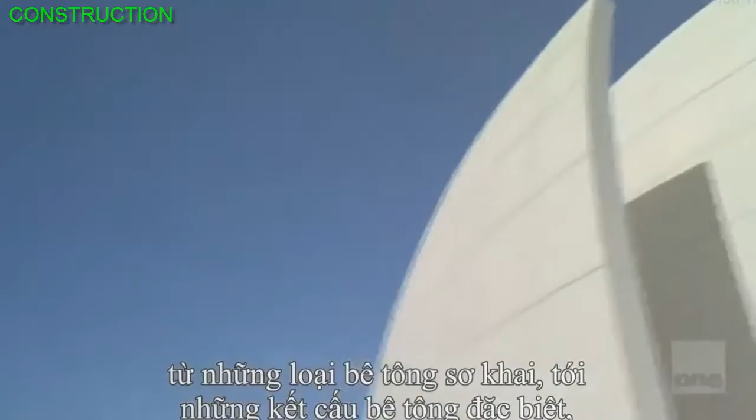Yet how these simple components are mixed together can make the difference between tragedy and triumph. From the mundane to the massive. From the ordinary to the extraordinary. Concrete helped pave the way for innovation and laid the foundation for the world's greatest civilizations. Now, go inside the science of concrete.

It starts out like liquid. When it dries, it becomes stone hard. This amazing metamorphosis has earned concrete the nickname liquid rock. It has served as a cornerstone of engineering for centuries. And it's a highly prized tool of construction for a reason.

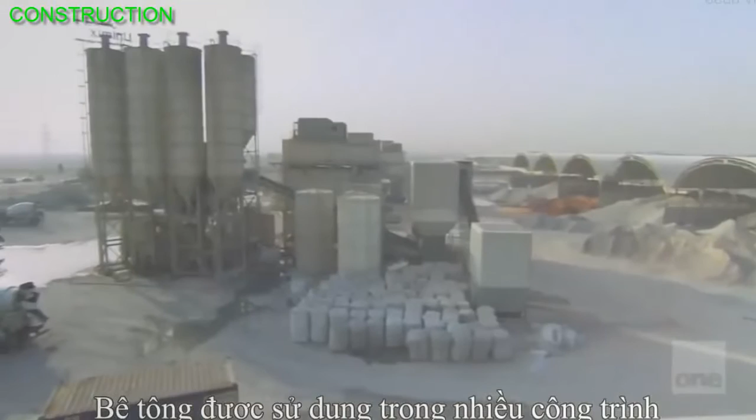It's easy to take concrete for granted. People see it in sidewalks and roads all the time, every day. But in fact, it is the closest thing to a miraculous material in construction that we've ever had. Concrete is everywhere. It has an almost unlimited engineering potential. It can take on nearly any shape and forms the backbone of a variety of the world's construction.

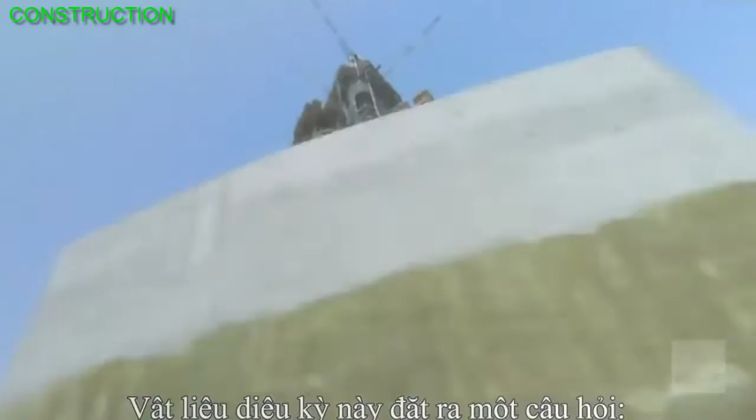Superhighways, massive bridges, man-made waterways, mega dams, the world's tallest skyscrapers. This miracle material begs the question, how does it do it all? I worked on a lot of jobs, and basically they all have a different formula for their concrete. Now I can't imagine the world without concrete.

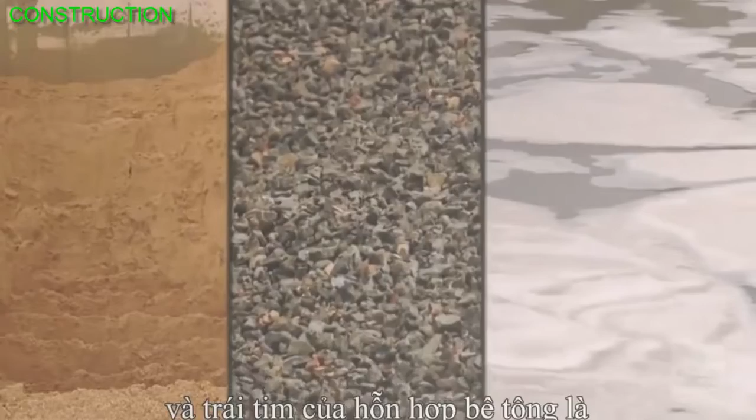The basic formula for concrete is simple: sand, crushed rock, called aggregate, water, and the heart of the concrete mix, cement. Cement, it is the gray, powdery material that acts as a glue that sticks all of the concrete together. It covers and coats all of the gravel, the sand, and the rock as a way of gluing and binding the whole material together.

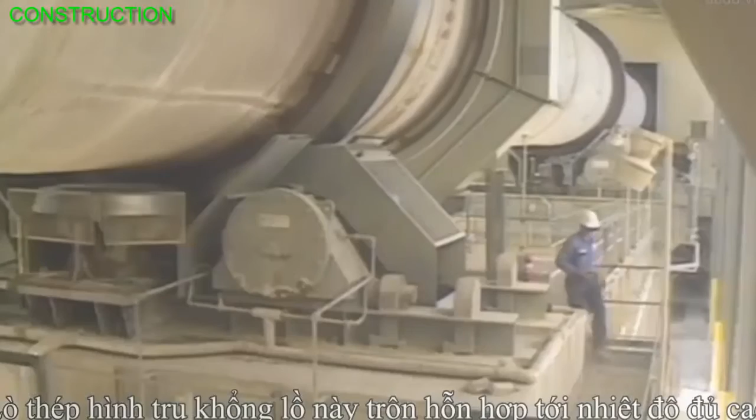To make cement, you need limestone, clay, and other elements like iron. These ingredients are crushed and combined into a powder that's poured into a kiln. The massive cylindrical spinning kilns heat the mixture to a temperature as high as 2,700 degrees Fahrenheit. The mixture becomes partially molten, forming a new marble-sized component called clinker. Once cooled, machines grind clinker into a superfine powder we know as cement.

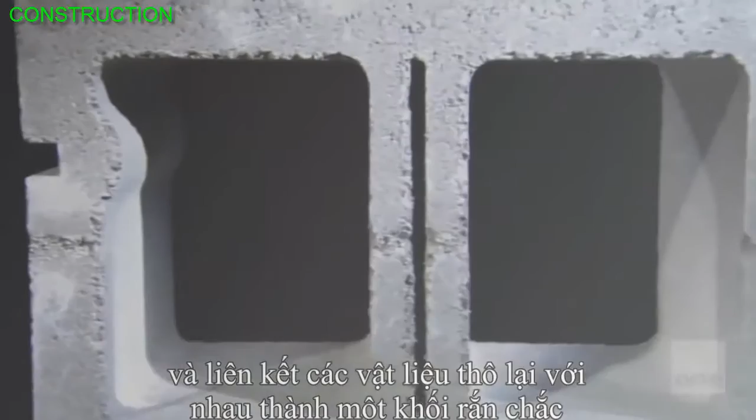Cement binds the ingredients together. When added to sand, water, and crushed rock, the cement reacts, linking the raw elements into one powerful whole. Water is the key. When cement reacts to the water, it undergoes a transformation called hydration. During this reaction, a node forms on the surface of each cement particle. The node grows and expands, linking up with other nodes. It sticks to the crushed rock and sand in the mix. Cement binds these ingredients. As it solidifies, concrete becomes a building block of modern construction.

The water actually allows a chemical reaction in the cement to allow it to harden. People often think that concrete hardens by drying. It actually hardens by hydrating or getting more wet. The water in the cement mixes with a lot of the minerals and chemicals that are in the cement, and by that mixture forms a new compound which then hardens. This basic process hasn't changed in over a century.

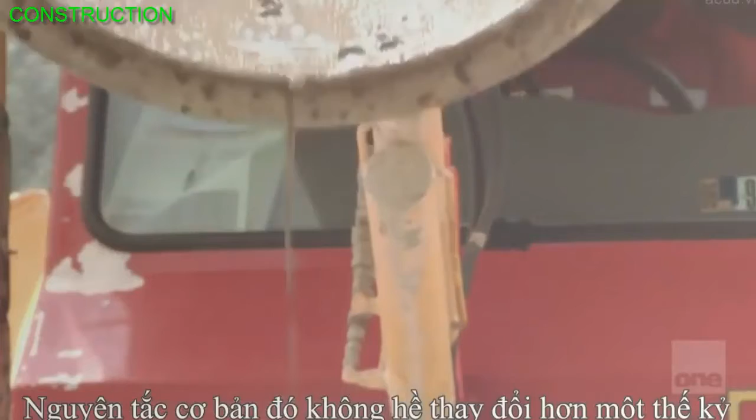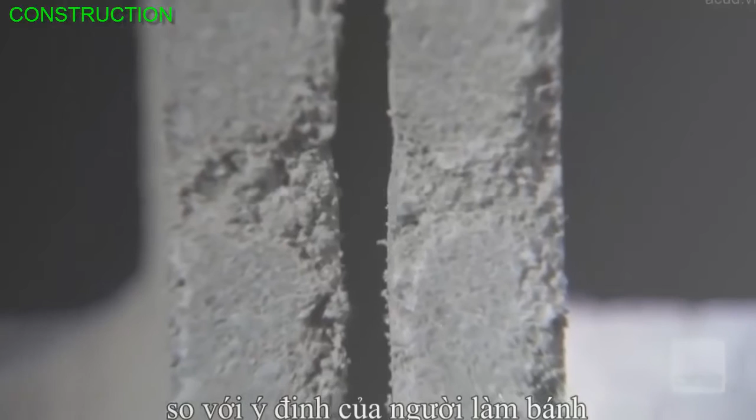But creating concrete is no simple matter. Making the right recipe requires precision and flawless preparation. It is a synergy of ingredients and timing. In a way, making concrete is like making a cake. There are lots of different recipes to make a cake. You get different flavors, different colors, different textures, but there are also lots of ways that you can make a cake wrong. It's not going to set properly, or it can come out in a way that's very different from your intentions. Getting the recipe right is everything, and the consequences of a flawed mix can be deadly.

The residents of Mexico City learned this the hard way. On September 19th, 1985, the Mexican capital is rocked by an 8.1 magnitude earthquake. It causes up to $5 billion in damages. Investigation of the rubble reveals that many of the buildings had been made of a substandard concrete.

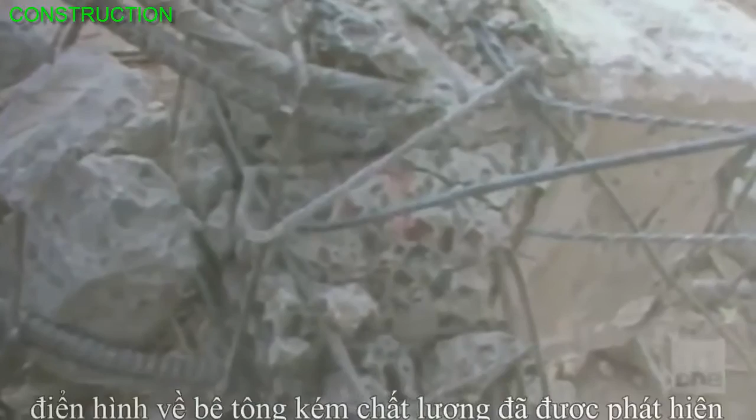Yes, we saw examples after the Mexican earthquake where when you use inferior concrete and you skimp on the rebar, and we saw both extensively in Mexico City, the concrete doesn't have its expected strength. The result is walls would fracture and shear and the building would collapse when the expectation would have been that the building should have easily survived to preserve health and safety. The consequences of this quake are tragic. An estimated 10,000 die. Another 50,000 are injured.

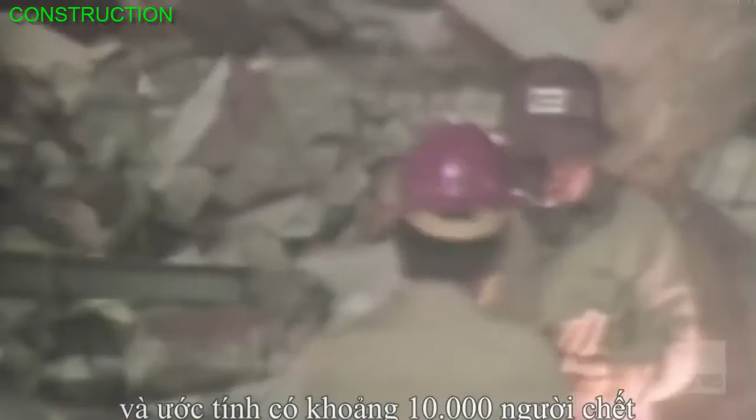But with the right formula, structures made of concrete can endure thousands of years. The ingredients for concrete have stayed the same for centuries. But there has always been room for innovation. With special ingredients and slight adjustments to the formula, concrete can adapt to the challenge of a specific project.

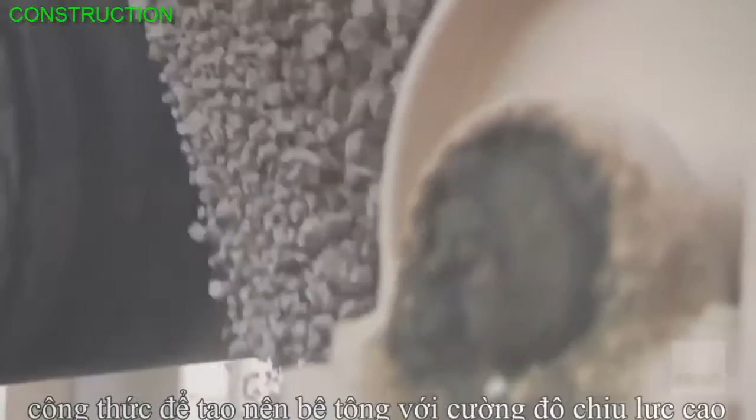Want a dam to hold back 52 million gallons of water? Add less aggregate to the formula to create a concrete with greater density. Want to create the foundation of an epic skyscraper? Add less water for a faster drying mixture. The array of different recipes is virtually infinite.

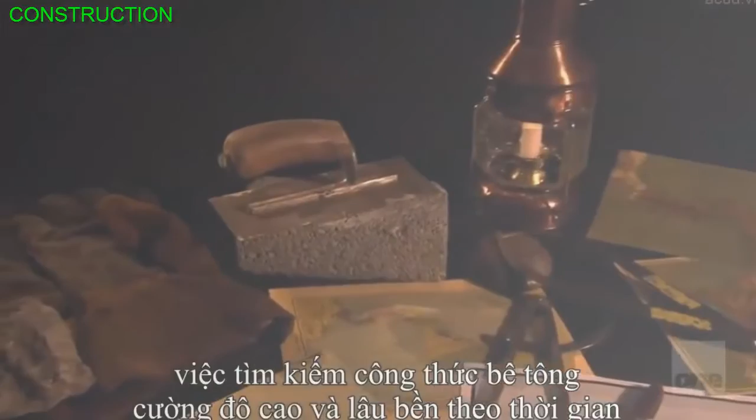The hunt for the right formula for a specific project is nothing new. The search for the strongest and most durable recipe goes back thousands of years. Although other civilizations, including the Egyptians, experiment with concrete, the Romans transform it from a supporting material to a main substance. In Rome, liquid rock fuels the dreams of an empire.

The word concrete even originates in Rome. From the Latin concretus, it means grown together or compounded. Roman concrete contains the traditional ingredients of sand, water, and crushed rock. But volcanic ash from the hills of Pozzuoli, Italy, transforms the material.

The Romans were very astute architects and engineers, and they recognized that by mixing volcanic ash from near Pozzuoli in Italy, they were able to get a concrete that became very hard. This volcanic ash proves to be an adhesive binding agent. It gives ancient Rome a powerfully strong concrete.

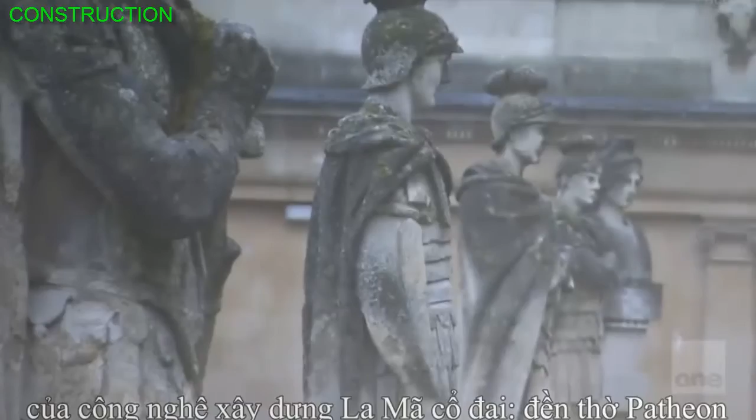This innovation allows the Romans to craft an empire from the ground up. Concrete becomes the backbone of a dizzying array of structures, aqueducts, bathhouses, and markets. But today, one structure alone stands as a unique testament to the power of ancient Roman concrete: the Pantheon.

The Pantheon is one of the great architectural works of ancient Rome, with the wonderful colonnade that introduces the building, and then a huge drum covered by this amazing 142-foot dome, and that dome is made of concrete. Constructed around 125 AD, the Pantheon has stood prominently in the center of Rome for over 1,800 years. It is one of the world's oldest buildings in continuous use.

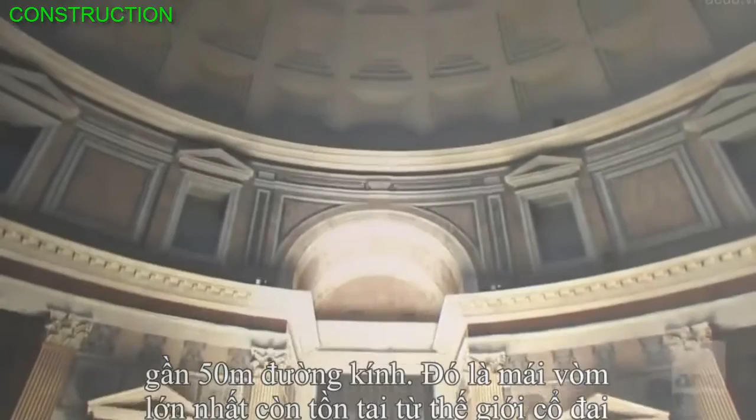This former temple to the Roman gods combines elements of engineering and design, and nowhere is that more apparent than in this concrete dome. Stretching 142 feet in diameter, it is the largest surviving dome from the ancient world. It was the largest dome in Western Europe until the 15th century. Unlike modern-day domes, which are generally reinforced, the only material holding the dome of the Pantheon together is Roman concrete.

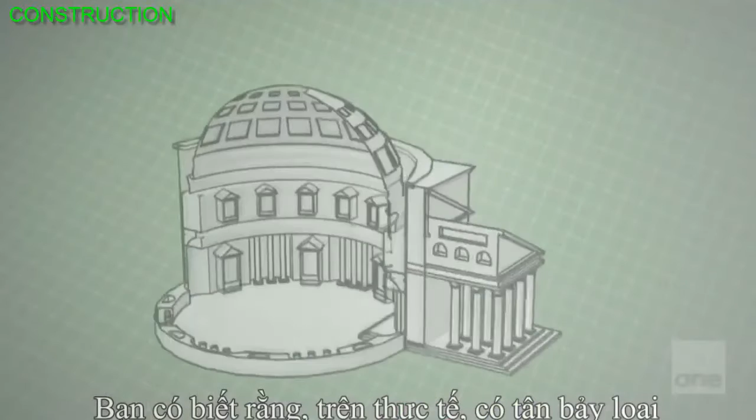Constructing an unreinforced concrete dome on the scale of the Pantheon is just an incredible engineering achievement. You couldn't do something today because everybody would have appraised the odds of your success as so small as you would never get a chance to do it. There's actually 7 different types of concrete used in the construction of the Pantheon dome.

And the way they distributed their aggregate and changed the composition of their concrete so that the areas that had to take tremendous compressive loads, like the weight of the dome at the base, the aggregate is huge, 9, 10-inch rocks. But as the dome gets near the top, of course, there's less weight, so they switch over to pumice. Near the top ring is very high pumice content, almost 80, 90% pumice, to make it lighter. It is the Romans' ability to modify the formula for each stage of the dome's construction that allows it to stand to this day.

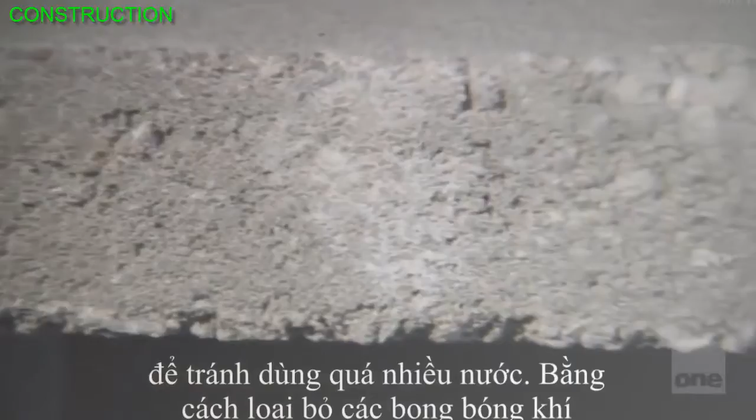The Romans also faced an immense engineering challenge: air bubbles. Pockets of air can form in the concrete during a pour. When the water dissipates, these holes can lead to cracking. To solve this problem, the Romans tamped or tapped the concrete, avoiding the need for excess water. By removing the air bubbles, the Romans increased the dome's strength and stability.

The Romans also wanted to reduce the overall stress on the dome. To do this, they created sunken panels called coffers. These panels are decorative, but also take weight off the dome. They are a synergy of architecture and engineering.

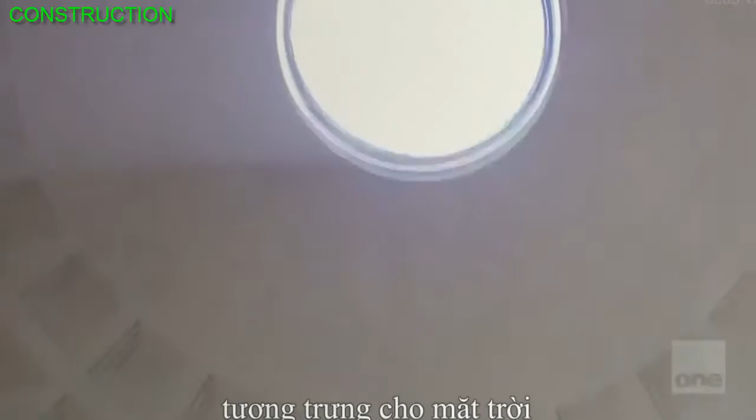However, there is one feature that stands out in the Pantheon's design. The dome's interior was designed to look like the Roman heavens. It features an interior circle called an oculus, or great eye, representing the sun. 27 feet across, the oculus is the source of all light for the Pantheon.

The oculus reduces the amount of weight and stress at the center of the dome, giving the whole structure added durability and strength. It is an engineering marvel. The dome of the Pantheon is a stunning example of how Roman concrete could be built to last.

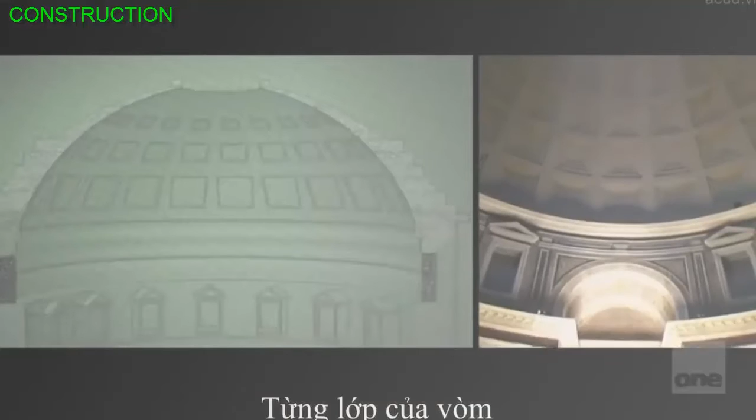Each layer of the dome becomes less dense the closer it gets to the top. At its weakest point, the Romans designed an oculus which reduced weight and stress. These innovations continue to impress engineers almost 2,000 years later. For 1,500 years, that was the largest dome ever built by man. There aren't many engineered structures that stand that kind of record of time.

And then all the countless uses the Romans made for engineering aqueducts and other structures, roads, that made their civilization come together. So it's very difficult to imagine the Romans without concrete technology. The Pantheon's one-two punch of engineering know-how and architectural innovation influenced many structures to come. Thomas Jefferson's Rotunda at the University of Virginia, the Low Library at Columbia University, but none comes close to the Pantheon's lasting power.

With the fall of the Roman Empire, concrete is relegated to a supporting role. It is no longer the building material of choice. All that remains is the engineering brilliance of the Pantheon and other Roman structures made of concrete. Now go back inside the science of concrete.

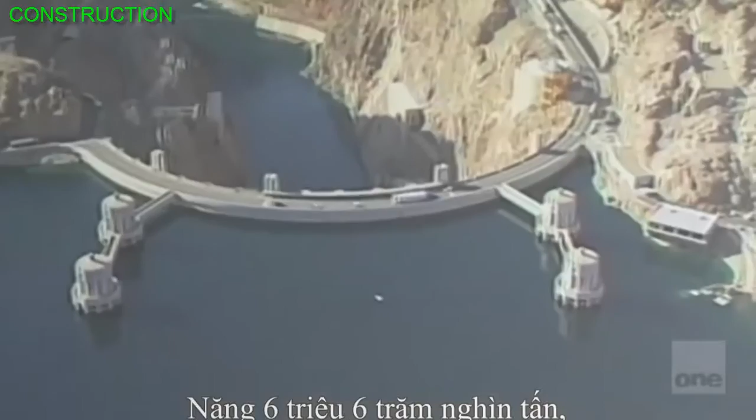It has been called an American pyramid. The mighty Hoover Dam is a testament to the power of concrete. Weighing 6,600,000 tons, this concrete colossus holds back 45,000 pounds of water per square foot. The force of this water generates hydroelectric power for over 1 million people.

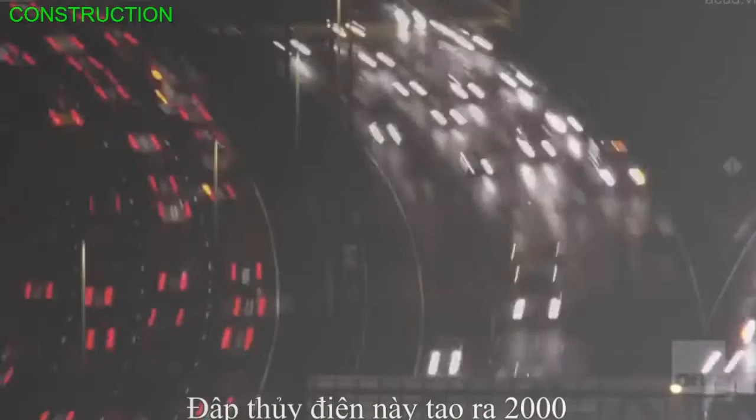From the neon lights of Las Vegas to the freeways of Los Angeles, this hydroelectric dam generates 2,080 megawatts of electricity. The Hoover Dam's construction redefined what the world could do with concrete, but it also rerouted one of America's greatest rivers, flooding ancient canyons, reshaping the area's natural habitat.

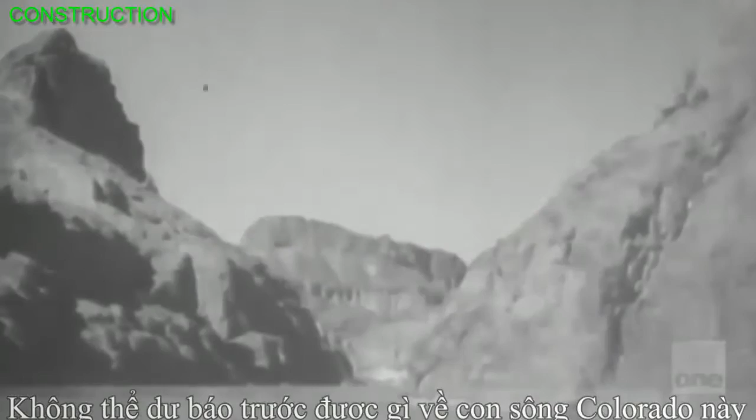In 1905, the Colorado River breaks free of a man-made canal. It floods Lower California across 150 square miles. Epic floods wipe out thousands of farmers. Millions of dollars are lost. The Colorado is unpredictable. The Southwest also has another problem: power. The boom towns of Los Angeles and Phoenix are growing at a rapid rate and desperately need energy.

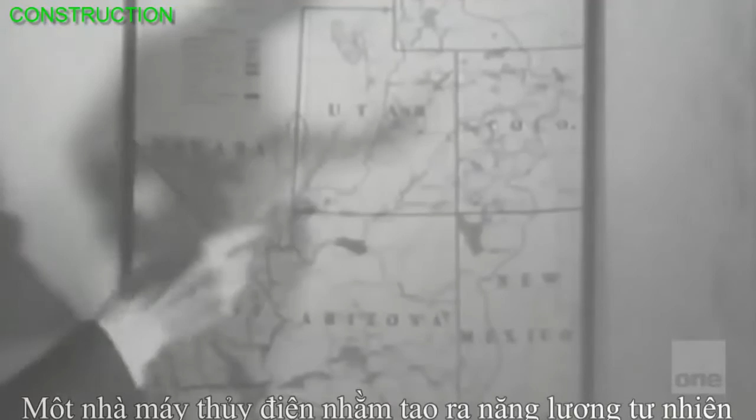Raging floods and lack of power, two different problems. But engineers believe there is one answer to both: dam the Colorado River. A hydroelectric plant would harness the natural power of the Colorado and, using simple mechanics, convert that energy into much-needed electricity. You're generally looking in the construction of a dam for a huge, solid structure. It's really about holding back enormous quantities of water.

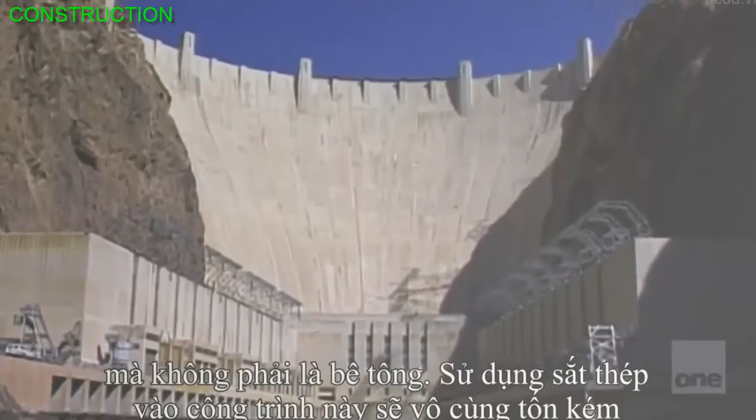The dam needs a material that is strong enough to hold back the raging Colorado. And since the location would be remote, able to be made on site. One material can meet all of those requirements. It's hard to imagine the Hoover Dam being built out of any material other than concrete. Using steel on this scale would be too costly. But to make the Hoover Dam, engineers would need more concrete than had ever been used before in one project.

The dam will be 726 feet high and 1,244 feet wide. With a structure this big, it will be impossible to do one massive pour of concrete. The amount of material that went into this dam was so enormous that there's no way to pour the concrete in one segment. So what they did is they divided the whole dam into lifts and then into individual blocks.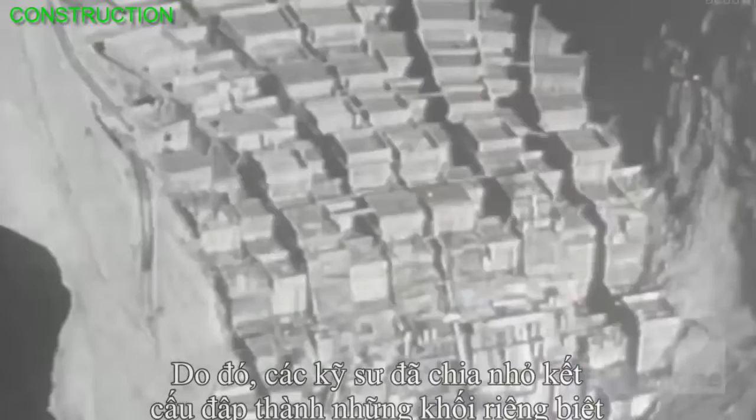The Hoover Dam needs to be built as a series of individual blocks that will interconnect. Trapezoidal in shape, the blocks rise in 5-foot lifts. This crucial engineering element allows the project to progress in stages. Something on that scale being built in concrete had not been built before.

Hundreds of pounds per square inch, thousands of pounds per square foot on the base of the dam, trying to push the dam downriver. And now you've got the Hoover Dam to stand this incredible water pressure trying to push it down the river. Chief Engineer Frank Crowe knows the completed dam will have to hold back 45,000 pounds per square foot of water. For this, they need a special high-strength formula.

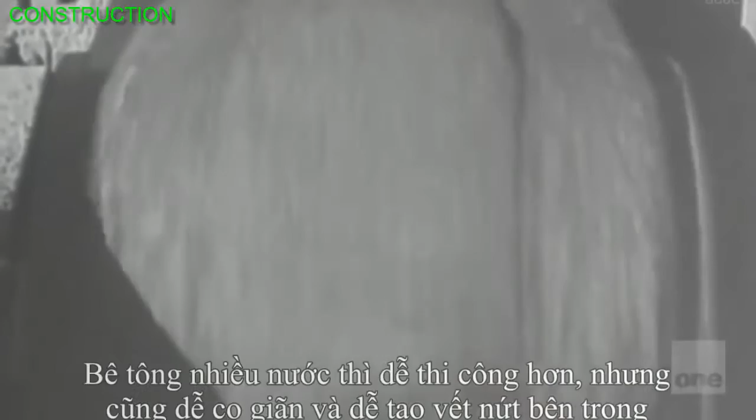Crowe's solution? A minor but crucial modification to the standard concrete formula. A very dry mix, one that uses less water. More water makes it more workable, but shrinks more, and shrinkage causes cracks. The less water, down to 7%, the better and stronger the concrete.

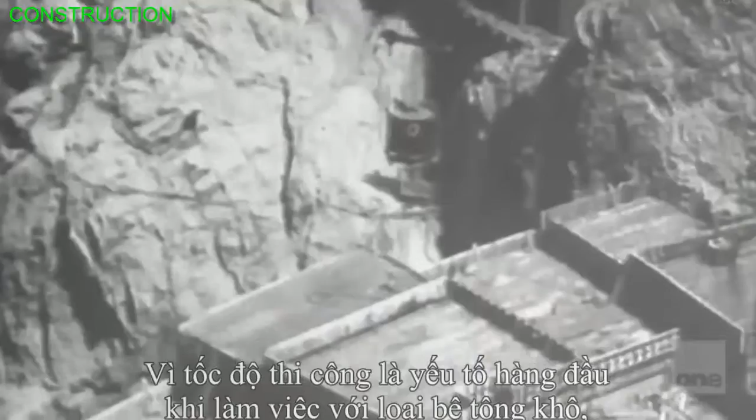The dam's remote location also means crews will have to build 2 concrete mixing plants on site. Shipping a very dry concrete formula from a facility far away would render it useless by the time it's transported to the dam. Because speed is of the essence when working with a very dry concrete mix, the crews working the pouring cranes have to push themselves to the limit to pour quickly and accurately.

Now go back inside the science of concrete. The process by which concrete cures, we call an exothermic reaction. By that I mean it gives off heat. And indeed, if someone pours a sidewalk or driveway around you, right after the slab dries enough to touch, put your hand on it. It'll feel warm. That's exothermic, it gives off heat you can feel, sensible heat.

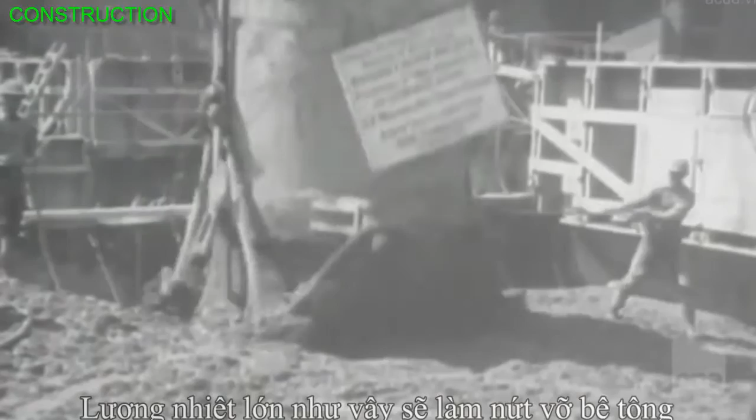As the amount of concrete going through this chemical reaction gets bigger and bigger, the amount of heat that's given off gets bigger and bigger. Engineers calculate that if the dam were built in one continuous pour, the concrete would get so hot that it would take 125 years for it to cool to normal temperatures. The extreme heat would also cause the concrete to crack and crumble away.

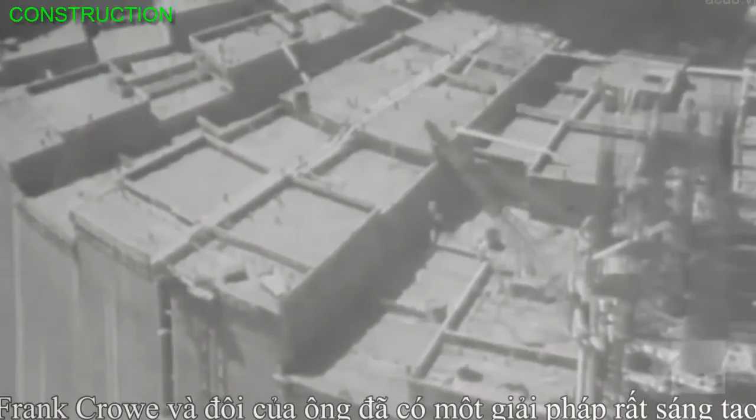Concrete dries from the outside in. If the concrete is not evenly cooled, it can crack, putting the stability of the whole structure at risk. Instead, Frank Crowe and his team of engineers have an innovative solution. Each block is outfitted with coils of thin-walled steel pipe. When the concrete is first poured, water from the Colorado River circulates through these pipes. The idea is to initiate a cooling process, but one done in stages. Cooling the concrete too quickly will cause it to crack.

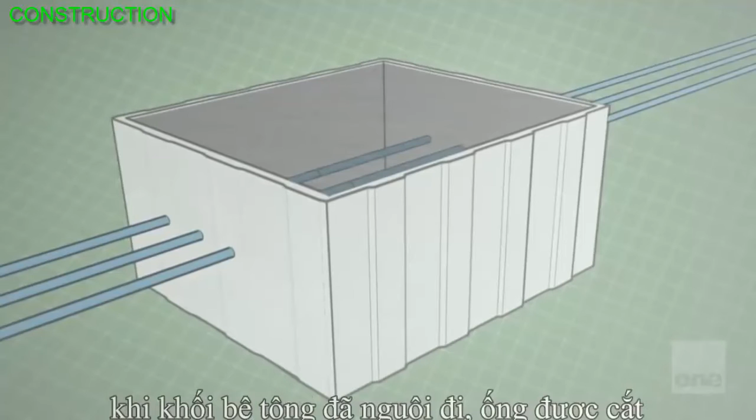After the concrete has received its initial cooling, chilled water from a refrigeration plant is circulated through the coils to finish the cooling process. As each block is cooled, the pipes are cut off, and they are filled with grout by pneumatic grout guns, pumping 300 pounds per square inch of filler.

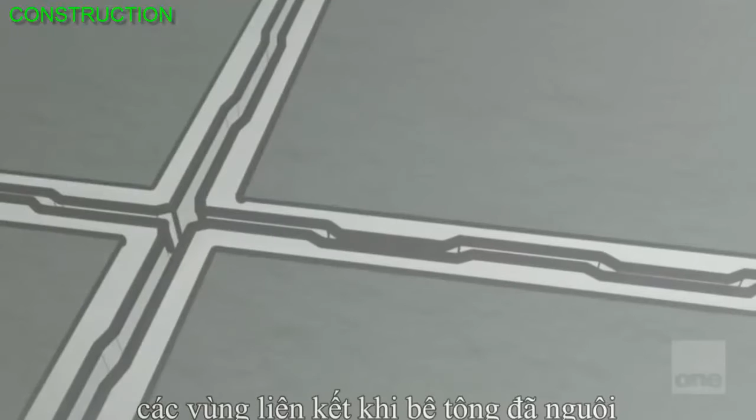Once the individual blocks have cooled and set, there is one final challenge. In order to prevent the hairline fissures between the blocks from weakening the dam, the individual blocks are formed with vertical interlocking grooves. When the concrete has cooled, grout is forced into these joints, bonding the entire structure into a monolithic concrete giant. This method takes advantage of one of concrete's fundamental properties. Concrete as a material is very strong in compression.

To build a structure, to make sure that the concrete is all in compression, you bend the beam like this, so now the water pushes on a column. Well, what's the water trying to do? It's trying to push that through. Well, it's the Pantheon dome again. Only this time it's the water trying to do it. It's trying to push the dome through the river gorge. What that does is put the whole structure in compression. Well, concrete loves compression. The more it is forced together while setting, the stronger concrete becomes.

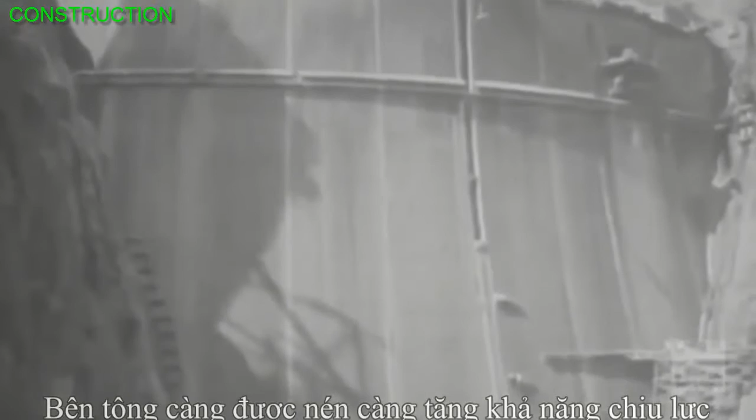As a result of this property, the Hoover Dam is arguably stronger today than it was on opening day, 70 years ago. The Hoover Dam is a testament to engineering know-how and a skillful use of concrete. The dam contains enough concrete to pave a strip 16 feet wide and 8 inches thick from San Francisco to New York. More than 5 million barrels of cement were used in the Hoover Dam, and a total of 21,000 men worked on its construction. And it represented an enormous engineering achievement to build successfully. It took the lives of over 100 men to build that dam.

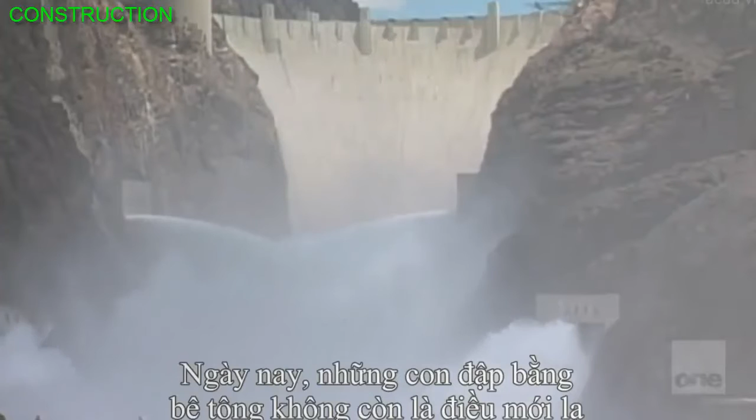Today, the concrete mega dam is nothing new. But Hoover set the stage and showed the world that concrete could do the job and help generate much needed power. It changed the course of one of America's wildest rivers. Now the question is, can concrete conquer the skies? Now, go back inside the science of concrete.

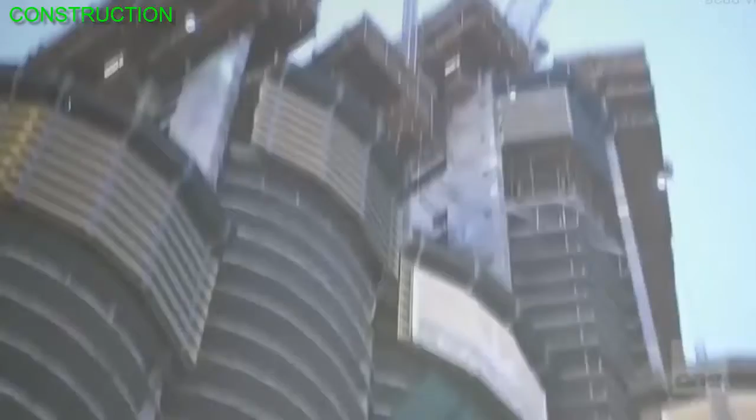In the scorching Persian Gulf, a growing structure cuts the horizon. Its expected height is a closely guarded secret, but experts around the world agree the Burj Dubai may be the world's tallest skyscraper. It'll be the tallest building, for sure, the overall title holder for some time to come. A construction project this massive needs 11 cranes and the world's fastest high-capacity construction elevators. The building rises at the breakneck pace of 1 floor every 4 days.

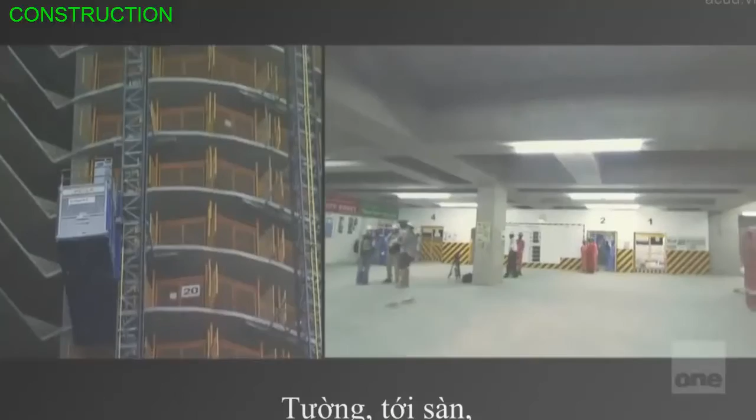And from the walls to the floors, to the columns to the stairs, much of this desert skyscraper is concrete. More than 160,000 cubic meters of it. At more than 2,000 feet, the Burj Dubai will be the crown jewel of the United Arab Emirates and is a shining example of a new generation of skyscrapers that seek to dominate the skies. It is a far cry from the humble beginnings of the concrete skyscraper, more than a century ago.

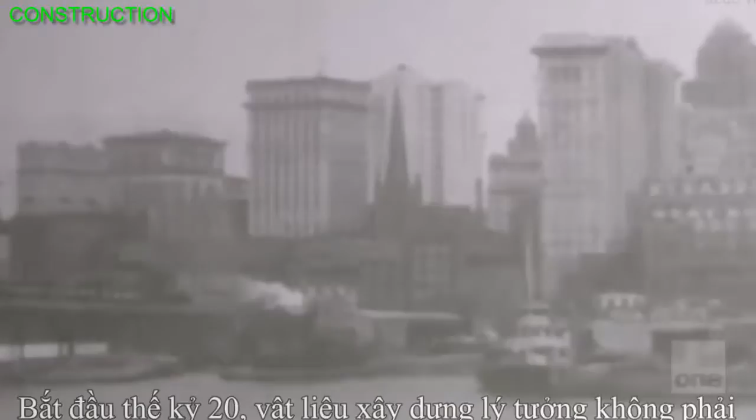At the beginning of the 20th century, the building material of choice was not concrete, but steel. You can build a hell of a skyscraper with steel. In fact, the Empire State Building is so overbuilt, you could probably add another 30 stories to it under today's building codes, and it would still comply fine. So steel was a great material. You can build a great building from steel, but it's an expensive way to go.

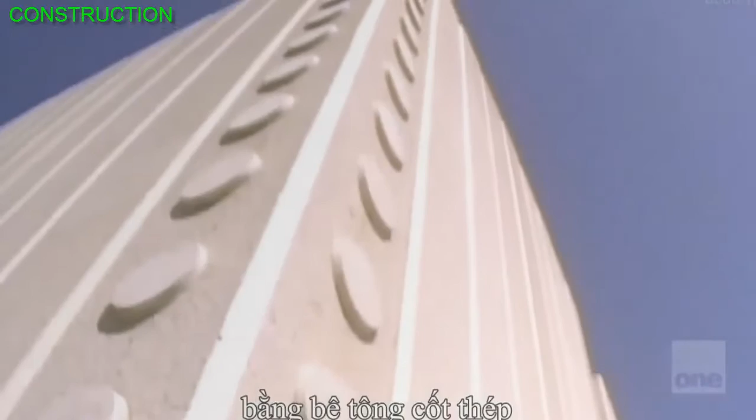And steel is not only costly, but represents a challenge for a new generation of skyscrapers that grow increasingly higher. And if you're gonna go tall, the building's gotta be stiff. It is so much easier to make those thick, stiff walls from reinforced concrete than steel that it's a no-brainer. The Petronas Towers in Malaysia are concrete, and this new one in Dubai is gonna be concrete. If you're gonna go that high, it's gonna be concrete.

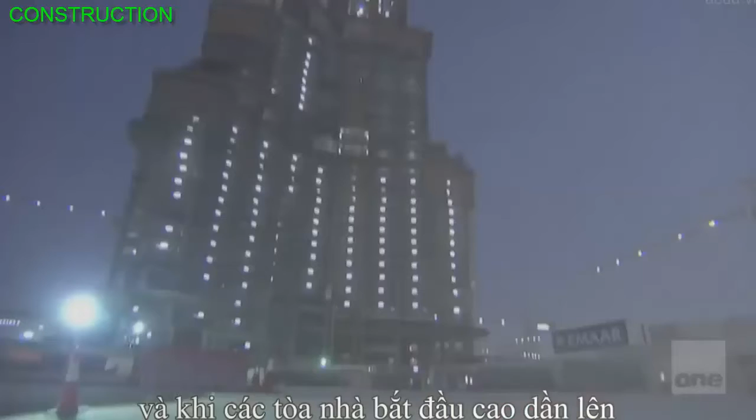The stiffness of concrete, combined with its availability and relatively low cost, have made it the building material of choice for these new skyscrapers. As our experience and comfort level with reinforced concrete came along, and as the buildings started getting taller, reinforced concrete really became the material of choice.

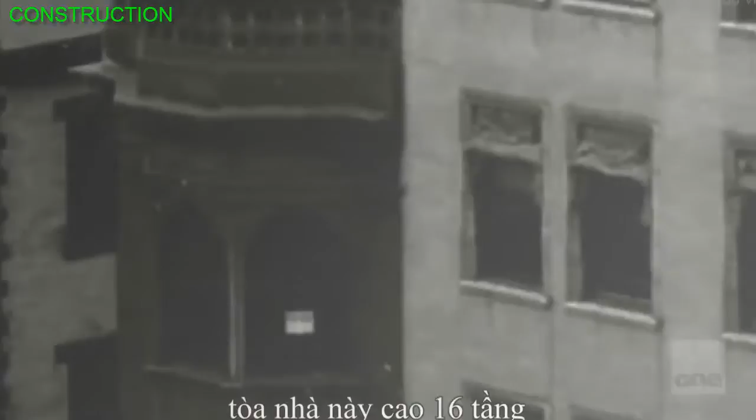Before 1902, the tallest steel reinforced concrete building is a paltry 6 stories tall. The Ingalls building in Cincinnati changes that. Engineer Henry Hooper dreams of a monolithic building of concrete, a skyscraper 16 stories tall. But many engineers believe that a concrete tower 16 stories high will collapse under strong winds or even its own weight. When Hooper finishes his building, there are many skeptics.

There's one anecdote that says that a reporter actually stayed up all night waiting for the Ingalls building to collapse because he was so certain that it was going to. Needless to say, the reporter was disappointed in the end. It is a towering success for its time. But at 180 feet, it is just one in a dizzying array of modern-day skyscrapers. More than a century later, the towering dream of Dubai aims to be over 10 times the size of the Ingalls building.

Every morning, workers assemble in the garage of the building. Erecting this much concrete in the punishing heat of the Gulf requires serious manpower. But before workers can pour a drop, the perfect formula needs to be mixed at the batch plant.

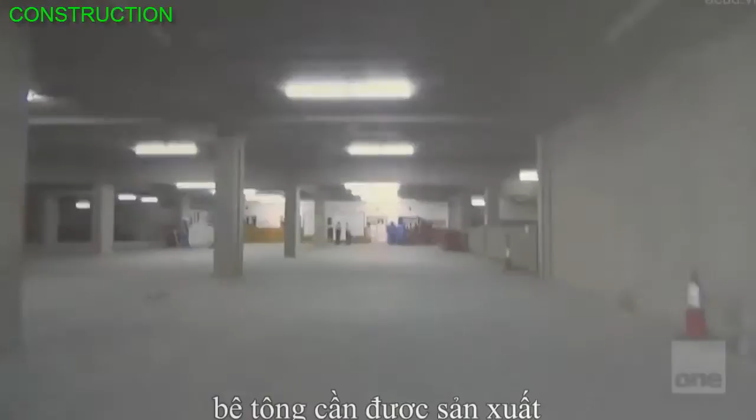The first problem this leviathan from the desert faces is its own height. The taller a building, the more it flexes, increasing the likelihood that it could flex to the breaking point, a deadly proposition. Older skyscrapers like the Empire State are safe because they use massive steel beams and braces. But erecting a tower nearly twice as high requires a material with even greater shock-absorbing qualities.

If you take something like the Empire State Building, and the wind blows on the Empire State Building, well, the wind creates pressure, which is going to try and bend the Empire State Building over. But as you go higher, imagine now going twice the height of the Empire State Building. The wind gets more surface to work on. Indeed, buildings collapse when the flex is so great that the weight of the building gets outside of its footprint and the building doesn't have strength enough to handle that. Down it comes. Now go back inside the science of concrete.

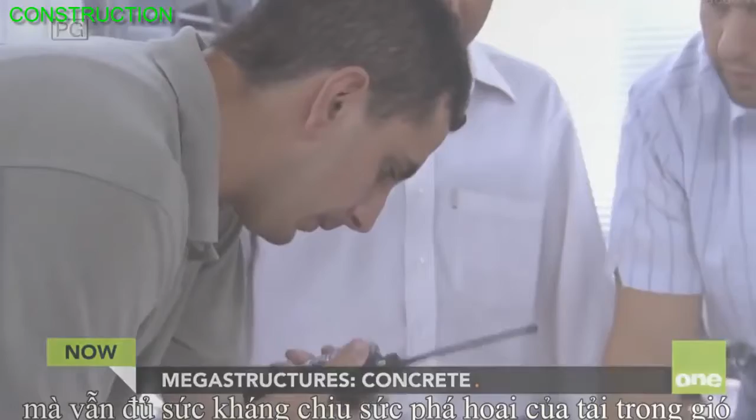Builders will need a formula that is almost as strong as cast iron, yet more resistant to damage due to vibrations from the wind. After extensive computer and wind tunnel testing, the architects behind the Burj Dubai will use a high-strength concrete formula. It contains slag, a byproduct of the steel industry, and microsilica, which gives the concrete added strength.

If you look at the microstructure of concrete, there are many, many spaces between the particles that are either hollow, so we call them pores, or they are filled with water. Microsilica plays the role of filling these pore spaces, and therefore it makes concrete much more dense, more durable, and stronger. And in order to make sure that the formula is consistent, Alam Feroz, quality control manager for the concrete of the Burj Dubai, routinely tests the concrete before it is used in the skyscraper.

I'll give you an example. Like if you're giving blood to a patient, how important is the blood to be tested before you give it to the patient? It's a big risk. So same is with the concrete. When it has been tested, I get confident that whatever I'm giving to the structure is tested and it complies with the requirements. It won't be just a mere guess.

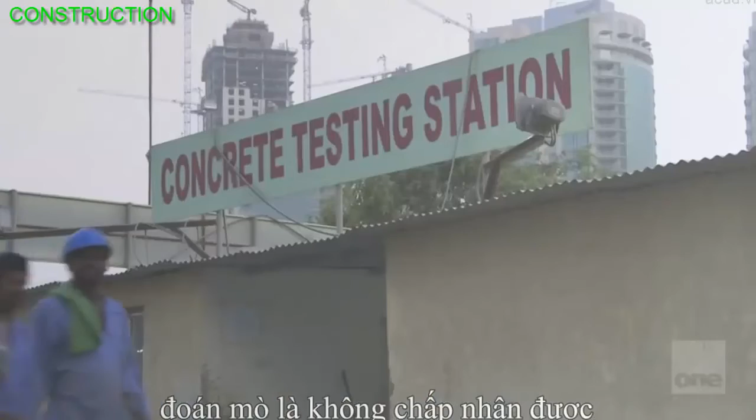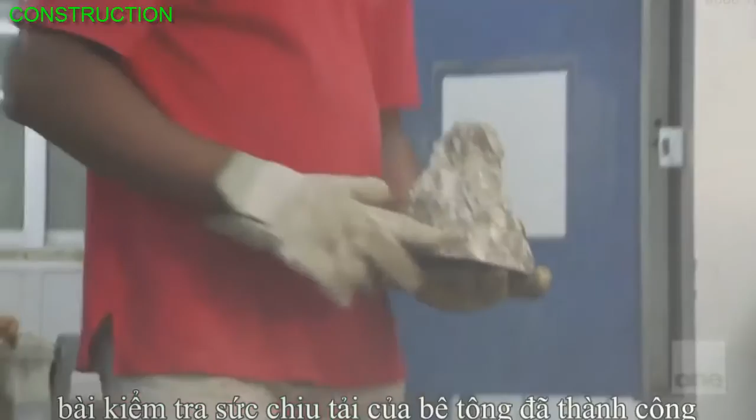To test the strength of the concrete, small cubes are hardened in cool water. Next, the concrete is deposited into a crusher for a stress test. This cube holds up to nearly 14,000 pounds per square inch, making it a high-strength concrete. The concrete test has been successful. But as strong as this formula is, it still has to contend with desert heat.

Temperatures top 120 degrees. How do you keep concrete cool in the desert? Builders use a deceptively simple technique. Shaved ice. While it's being mixed at the batch plant, slices of ice are mixed into the concrete so that it remains cool inside of the mix trucks. When it arrives at the building site, the melted ice has kept the concrete from overheating.

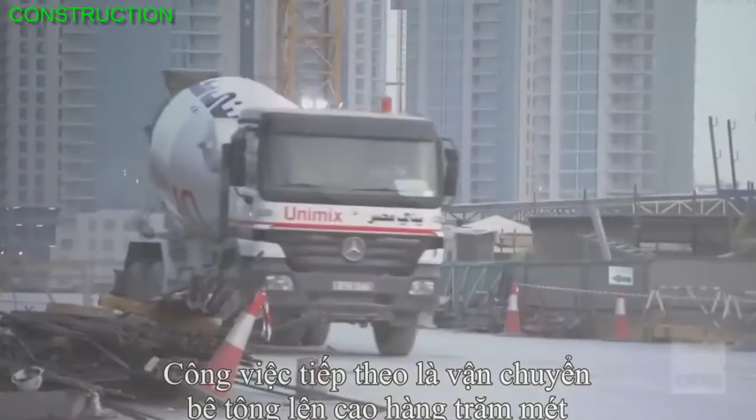But now, the concrete has to travel hundreds of feet into the air. The key technical problem for building a building of this size and of this height is going to be to vertically pump concrete of the order of 2,000 feet high. It takes huge amounts of pressure. Mixer trucks deliver the mix to the pumps. The building requires 3 pumping stations where the liquid concrete is poured. The high-pressure pumps force the concrete through a complex system of pipes.

Now, the technology to do so is awesome. If you think in terms of water, you have 1,000 feet of hydraulic water pressure. That's a tremendous kind of pressure. Now, concrete weighs 2.5 times as much as water. So you need a piping system that's so much stronger, and also pumps that are so much more efficient to pump concrete up that high.

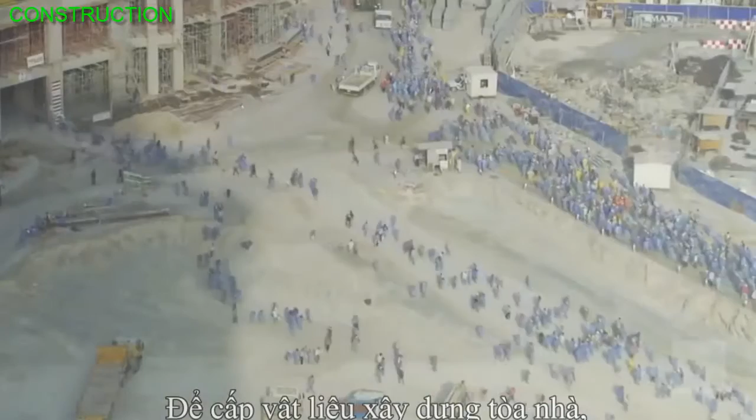As the sun sets, the second shift workers return to feed this growing skyscraper. The concrete pour takes place at night so that the concrete can harden evenly. At the moment, even though it's 10 o'clock at night, it's about 100 degrees Fahrenheit, and the humidity is about 90%. The advantage of pouring concrete in these conditions, because the humidity is so high, we don't have a problem with it drying out the top surface of the concrete, but we've got effectively another roughly 130 stories to go.

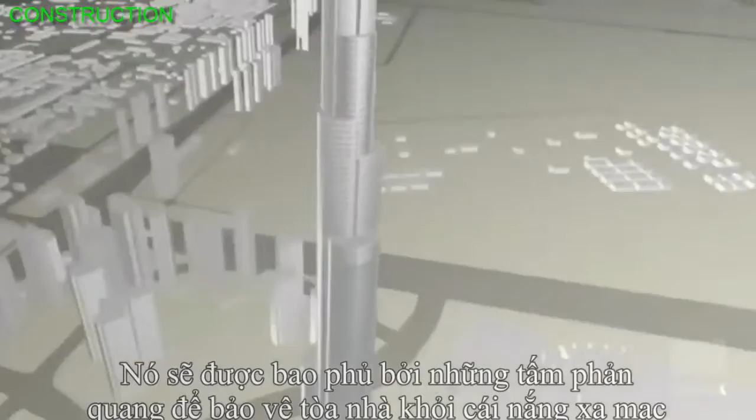As the pour continues into the night, the Burj Dubai has reached a milestone. 25% of the building is done. When completed, this megastructure will stand over 2,000 feet tall, making it twice as high as the Empire State. It will be covered in a reflective glaze to protect it from the extreme heat and high winds of the Gulf. But the building's guts are solidly concrete. When it's finished in 2008, the Burj Dubai will be the tallest building in the world.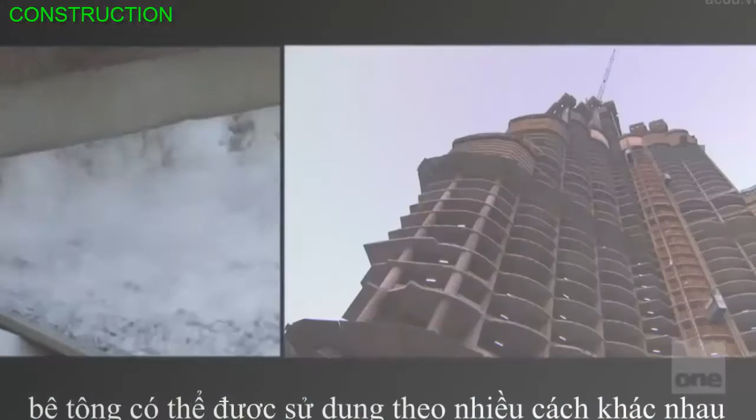Like the Ingalls, the Burj Dubai has set the standard for its day, showing once again that concrete can be used in a variety of ways for the world's tallest buildings. Now, reinforced concrete is establishing itself as a building material of choice for skyscrapers. Concrete has conquered the skies. Concrete's next quest, how to tackle the building challenges of the future. Now, go back inside the science of concrete.

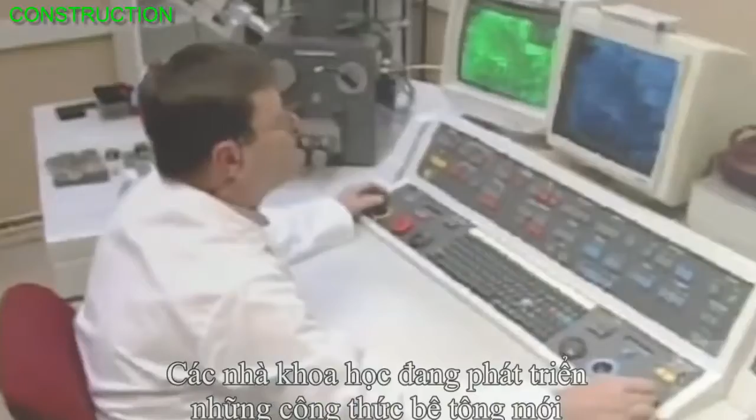Concrete has been a key ingredient in the construction of our civilization. It has been a fundamental part of our architectural past and is now paving the road for our future. Scientists are developing new formulas for concrete and are looking for ways to make it stronger, more environmentally friendly, and capable of doing things we never thought possible. Back where it all started, at the heart of the Roman Empire, concrete has taken a new and exciting turn. Just a few miles from the Pantheon, the Jubilee Church, designed by architect Richard Meier, uses a new form of concrete.

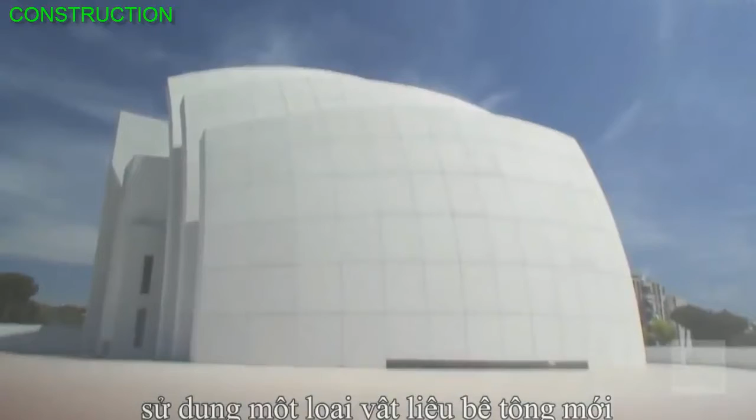The church was commissioned by the Archdiocese of Rome to commemorate 2,000 years of Christianity. For that, the building would need a material that was both ancient and modern, a material that would speak to the church's past and make a bold statement for the future. They would also need a material that would last the test of time. Concrete fits the bill. This church is remarkable for several reasons.

It has these three sail-like forms, loosely representing the Holy Trinity, but made in effect of giant concrete blocks. The shells of the church, which stretch out and up in the same way as the Sydney Opera House, are made of 346 white, reinforced, precast concrete blocks. Concrete, for all of its advantages, does tend to pick up discolorations from the atmosphere and so on. Meier, though, wanting to keep his building white, managed to work with local firms in order to achieve this concrete mix that included these photocatalytic particles that will absorb and neutralize the acids in the air. And in effect, what you'll have is a pollution-eating building.

Italcementi came up with a revolutionary new formula for the concrete that will keep it as pristine in 50 years as it was on opening day. All concrete structures tend to stain and degrade from pollution. Over time, this has given concrete a bad reputation. But the unique formula for the Jubilee Church contains a secret weapon: photocatalytic particles.

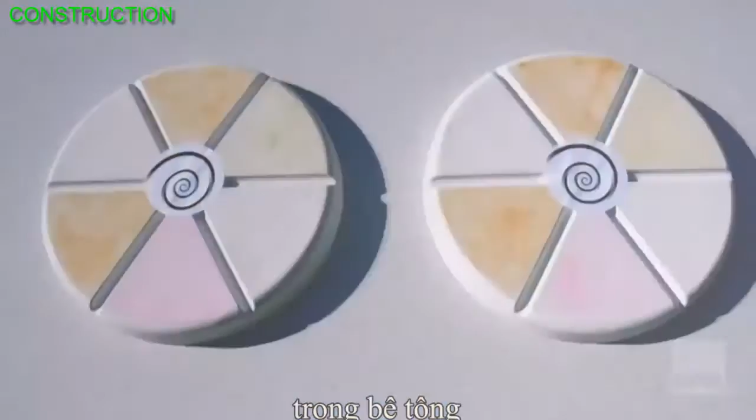Now, in effect, what these do, when activated by the light of the sun, they mix with the acids in the air and neutralize those acids, neutralize the discoloration that would come typically from atmospheric pollutants. So, in a way, you kind of have a self-cleaning building. This test demonstrates the photocatalytic particles at work. The concrete neutralizes pollutants, allowing it to maintain its brightness and not degrade over time. It is a revolutionary new development that has the potential to transform the way we look at concrete forever.

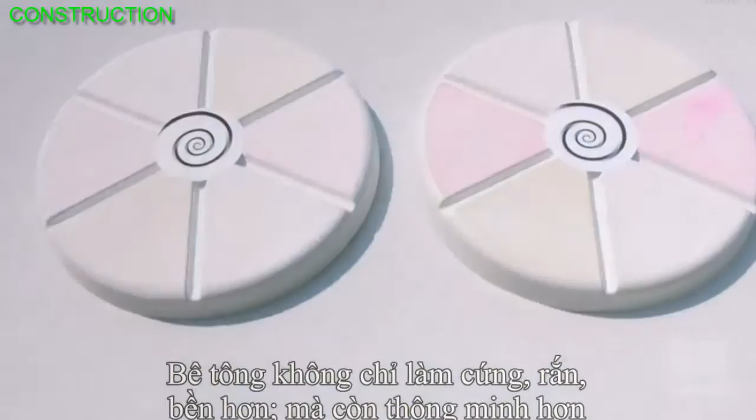Concrete isn't just working harder, it's working smarter. New developments in concrete technology now allow for what used to be unthinkable, helping the environment by using an unusual aggregate: glass. The innovation here has been in making sure that the glass doesn't get corroded by the lime in the cement mixture. One of the biggest issues with concrete is that the Portland cement tends to be quite corrosive, and this has been a big problem with things like recycled glass.

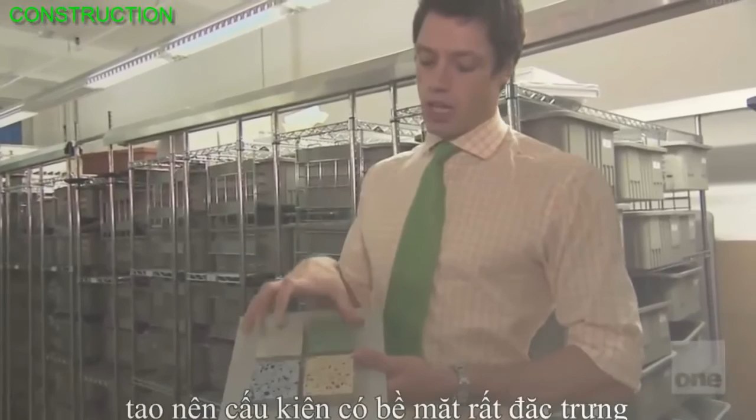It tends to corrode the glass, and the glass falls out. This composition of cement was actually developed by Columbia University. It is a much less corrosive, more benign cement, allowing you to put the glass chips in. So you can actually now have concrete with glass chips that actually has a good surface effect.

We are generating millions of tons of garbage, solid waste, and in New York City, approximately 6% of all solid waste is glass. That's bottles like this, yeah? And these bottles generally find their way into landfills. And that costs taxpayers hundreds of millions of dollars just to get rid of these bottles. Concrete's versatility allows it to bind with other materials, in this case, glass.

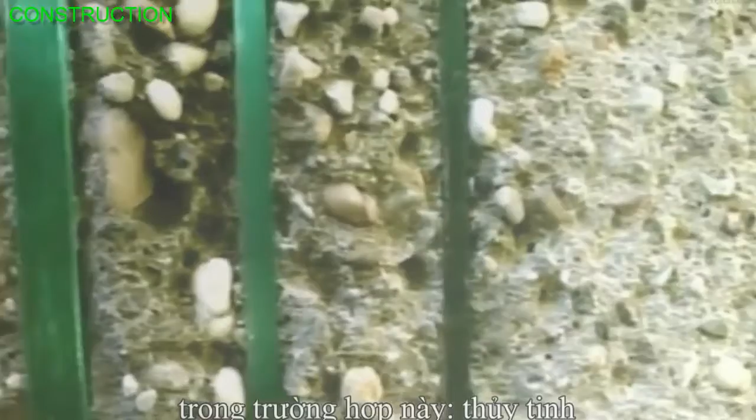The first step is to separate the bottles by color. And then you crush them in a crusher. Now, crushed glass is not something like this. This is what we call broken glass, and that is something you want to handle very carefully. It has sharp edges, and that was also one of the problems we were facing, because skeptics asked, well, if you use glass in concrete, won't people cut their hands by handling the blocks or whatever?

Answer is no, because when you crush the bottles in a high-impact crusher, it comes out in pieces like that, and it's just like sand. It does not have sharp edges. Eventually, the broken glass is crushed into a fine powder. So this is just like powder, like baby powder, the same kind of particle sizes. So if you put this finely ground glass powder into concrete, you can replace part of the cement by this glass.

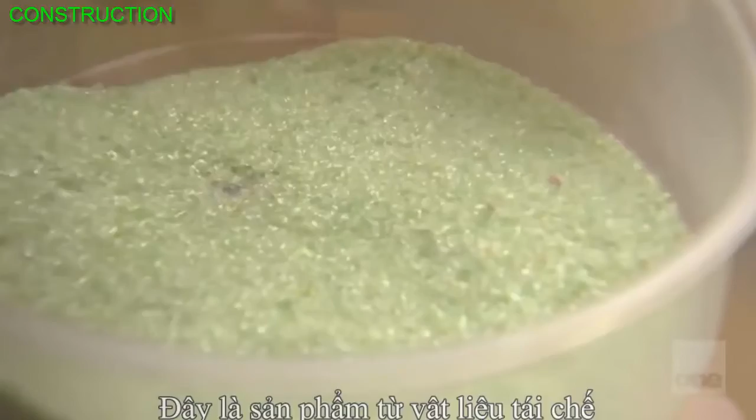These are actually 100% recycled glass pieces added into the concrete. Initially, scientists thought that recycled glass would make for a bad aggregate. But Professor Meyer and his team have found a way. Okay, so once you make concrete out of these glass particles and color coordinate it very well, then you can get something like this, and this is now already being commercially produced.

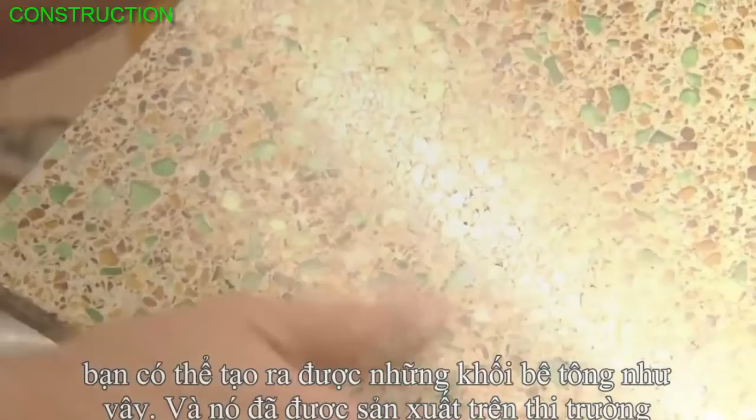That's the way regular concrete would look. And this here is our glass concrete, polished to a high precision, high grade of polishing. And that is known as terrazzo concrete. Using recycled glass as an aggregate is just one of the many ways that concrete continues to reinvent itself. It also may pave the future for a more environmentally friendly concrete.

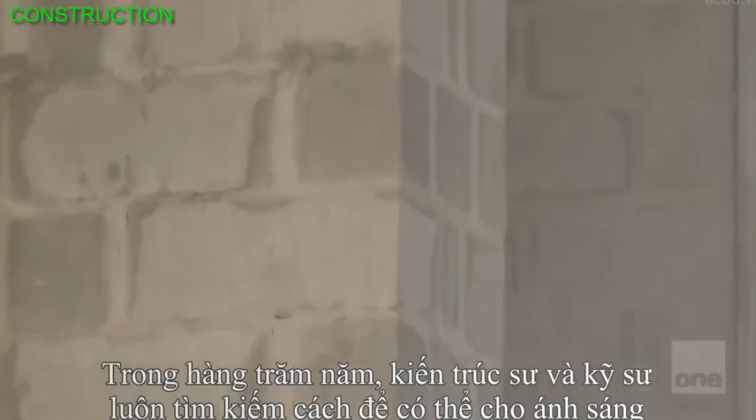There are also other developments reshaping concrete for the future. For hundreds of years, architects and engineers have sought a way to allow light into concrete buildings, homes, and offices in a more efficient manner. One of concrete's biggest drawbacks is that it creates dark buildings that do not effectively conduct light. Experts are working to change this. Okay, this is a piece of light transmitting concrete. It seems like an odd concept, but what they've done here is to take standard concrete and add glass fibers.

Okay, so what you're seeing here is the blue LED passing through the glass fibers that are embedded in the concrete. Imagine concrete allowing light to pass right through it, or for someone to cast a shadow through a concrete block. The same thing can happen with normal daylight as well. So the idea is that you can build a structure with this concrete and allow daylight to actually come through the structural element of the concrete.

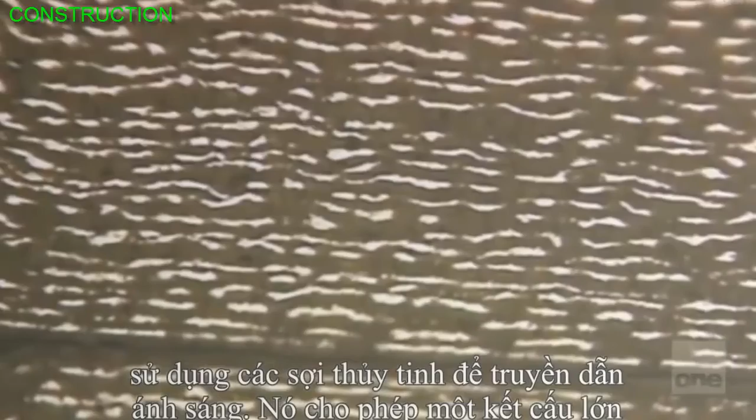Light-transmitting concrete, or LiTraCon, is a unique form of concrete that uses glass fibers to conduct light. It allows for massive structures to permit light to shine through. This technology has the potential to redefine what concrete looks like. Once considered cold and impersonal, these new forms of concrete are transforming the material.

What started off as the most basic of building materials is now on the cutting edge of building and design. The future for concrete is virtually limitless. If concrete is anything, it is a material that continuously reinvents itself. Concrete continues to adapt to the emerging challenges of our world and is laying the foundation for our future.